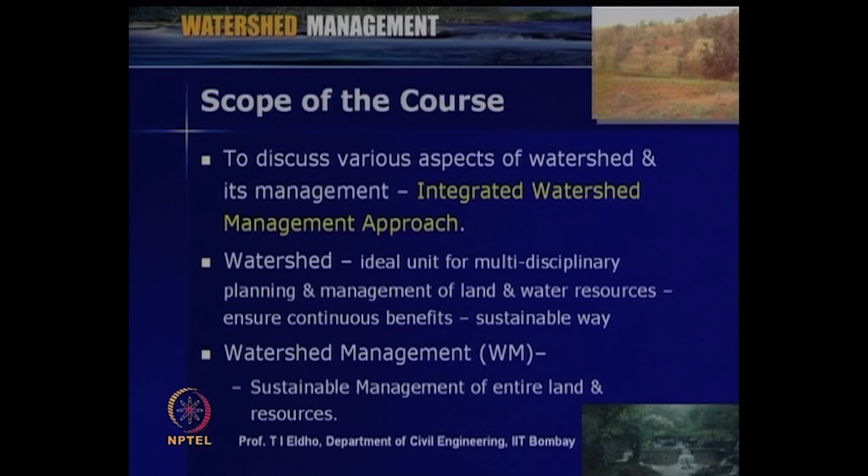The scope of the video course on watershed management is to discuss various aspects of watershed and its management in a holistic way. This course will be discussed following the so-called integrated watershed management approach, discussing the various resources in a watershed holistically. A watershed is an ideal unit for multidisciplinary planning and management of land and water resources, so that the various management practices ensure continuous benefits in a sustainable way.

A watershed is a geographical area delineated as per the topography, and that is the basis for the various management practices of water, land and other resources in that area. When we talk about watershed management, we discuss it in the perspective of sustainable management, meaning all the resources available in the watershed are managed in a way useful for both the present and future generations. Hence, it is the management of all the resources within the watershed.

Now coming to the course objectives. The various course objectives are listed here: to discuss various aspects of watershed development and management, that is, the resources within the watershed, its technological, social, ecological, environmental, and sustainable management issues in a holistic way. That is the main objective of this course.

The main focus will be the various technical aspects of watershed management, with emphasis on the perspectives on land and water management. We will be discussing the various complex issues within a watershed, analyzing the issues, and discussing the specific knowledge related to various issues of the watershed considered and its management in a holistic way.

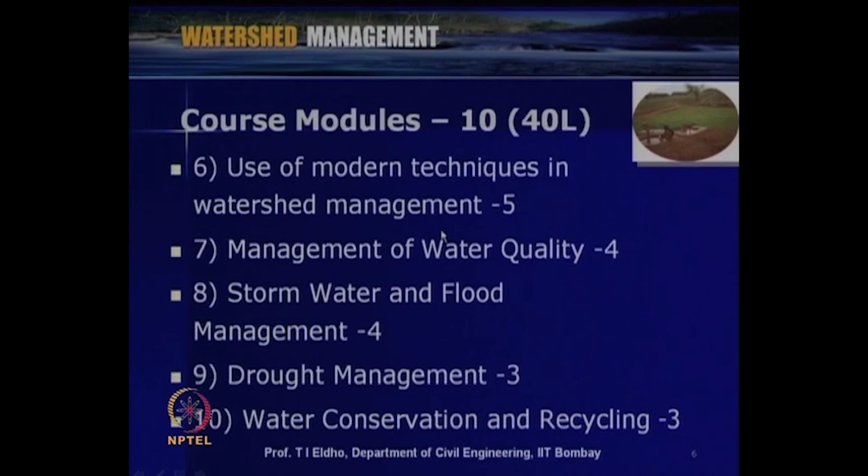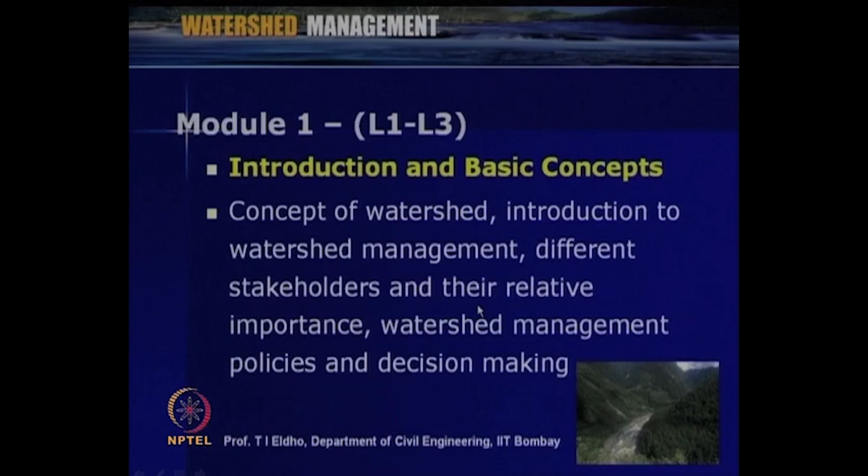Today we will be starting the first module, on introduction and basic concepts. This first module will have 3 lectures, covering the concept of watershed, introduction to watershed management, different stakeholders and their relative importance, and watershed management policies and decision making. We will discuss the first lecture today.

The first lecture is on introduction to watershed management. Today we will discuss the concept of watershed, watershed approach, common watershed problems, introduction to watershed management, watershed management necessity and principles, and a case study related to these topics. Important keywords for today's lecture include watershed management concepts, characteristics, deterioration, necessity and principles.

First we will discuss the concept of watershed. A watershed is a geographical area identified topographically, surrounded by ridges, where water falling on that area drains to a single outlet, as in a river or a lake. When we discuss watershed in a holistic way, we have to discuss the various issues happening with respect to land, water and various resources within the watershed.

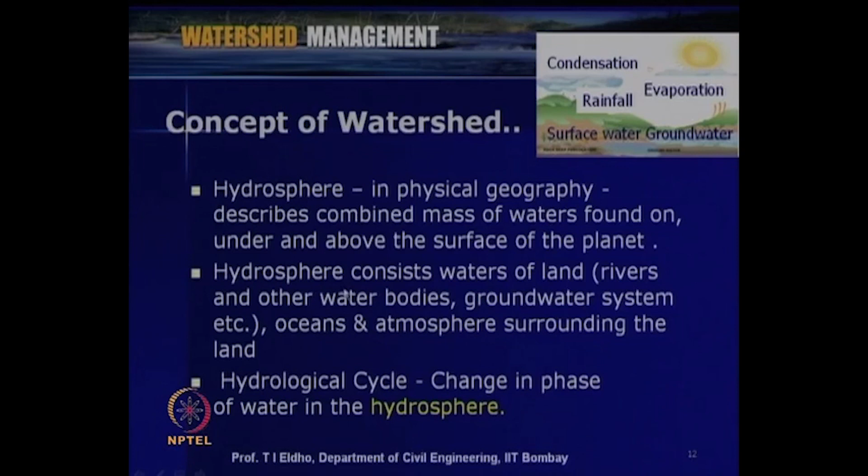Finally, evaporated water will be condensed and come back again to the system, say the watershed, which we consider as rainfall, and it will be repeated as a hydrological cycle.

When we discuss the management of water within a watershed, we have to see the various phase changes happening within it, like precipitation to runoff, and during that process, various stages like interception, evaporation, infiltration, and finally runoff from the outlet of the watershed. So the various issues related to water will be considered in a holistic way within the watershed.

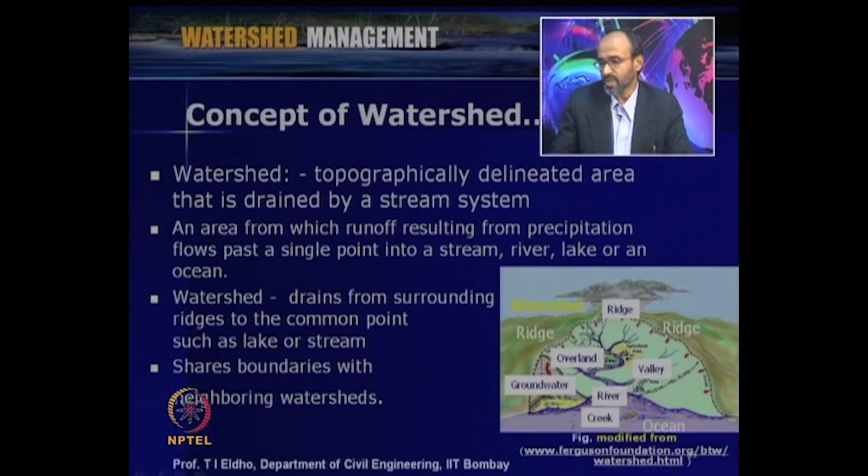Coming back to the basic definition: a watershed is a topographically delineated area that is drained by a stream system. A watershed is typically represented as shown in this figure, with a ridge here and another ridge there, and this is a major stream or river. Whatever precipitation falls on this watershed area is transformed to runoff and finally comes to the river, which we consider as the outlet of this watershed.

So this watershed is an area from which runoff resulting from precipitation flows past a single point into a stream, river, lake, or even the ocean, as shown in this figure. The water falling on the watershed as precipitation, whether rainfall or snowfall, drains from the surrounding ridges to common points such as a lake or stream.

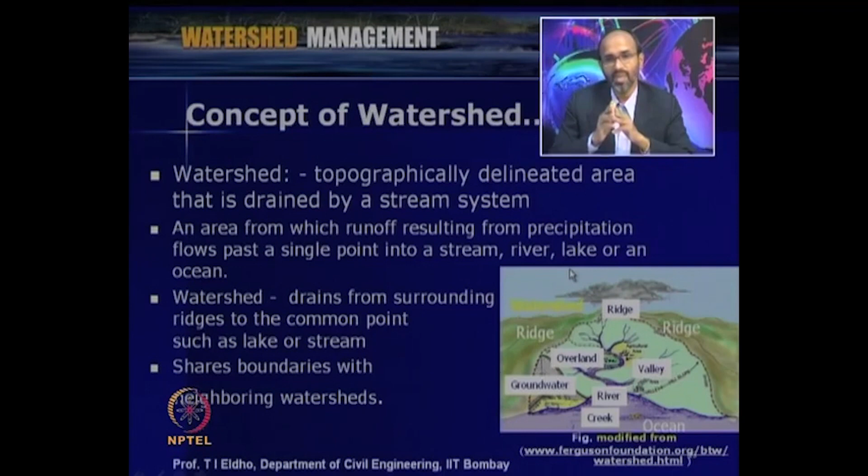When we consider the geographical area of the watershed, we delineate this area as a watershed, which is of course bounded by other watersheds. This is the watershed we now consider, but surrounding it on this side is another watershed, and on that side another watershed. So the watershed we consider shares boundaries with neighboring watersheds. We separate the watershed as a scientific unit for the various resource managements we consider. That is the basic concept of watershed management.

Before going into further details of the watershed and its management, we have to understand the basic characteristics of a watershed, since watershed management practices depend upon these characteristics. So we should have a fundamental understanding of them.

Some important watershed characteristics: first is size, second is shape. Size means it can be a larger or smaller watershed depending on the area considered. Shape means it will naturally be irregular - it can be a broader shape, an elongated shape, or a narrow shape. So different shapes are possible.

The third important watershed characteristic is the physiography, or physical geography - how the land is changing, whether the watershed has hills, plain areas, or sloped areas. So physiography is very important.

Another important characteristic is climate. As I mentioned, we will discuss various resources within the watershed, and one important resource is water. Climate issues like the rainfall pattern within the watershed, the temperature pattern and its changes, and how rainfall converts to runoff - all these issues will be discussed under climate related to the watershed.

Then the drainage system - as shown in this figure, for the considered watershed, the rainfall-to-runoff process takes place first over land and then through channels. The drainage system is a major factor; depending on it, water moves through the watershed. So the drainage system, its pattern and characteristics, is very important.

Another important issue is land use - how we use the available land for various resource management like agricultural practices and other uses, industrial uses. Land use is very important: how much percentage is forest, how much for agriculture purposes, how much for industrial purposes. So land use is a major issue.

Then, how much is the forest in the watershed. Vegetation is an important issue in most watershed management practices.

Another important watershed characteristic is geology and soils. The various resource management practices taking place within the watershed depend upon the soils and geological aspects.

Finally, another important issue for watershed characteristics is socioeconomics. For holistic development of the watershed area, we have to study in detail the socioeconomics of the people residing within the watershed.

These are some of the important watershed characteristics which we have to consider before going for any watershed management practices. All these various characteristics will be discussed in detail in various lectures.

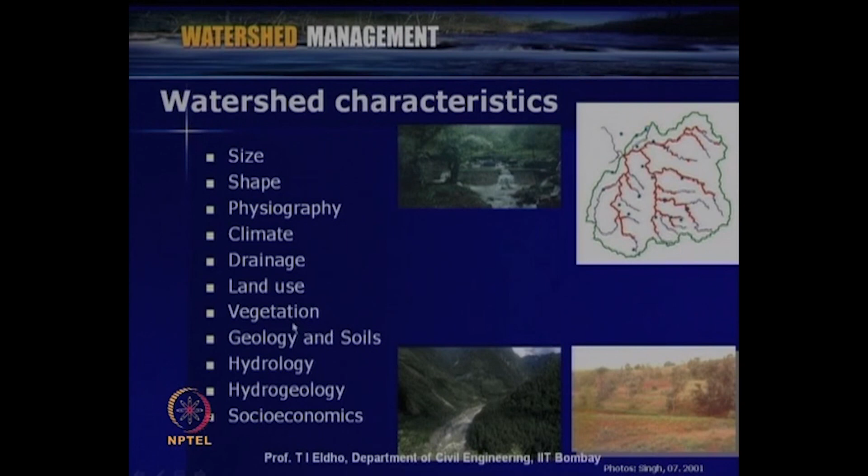Before going to other issues, let us initially look into the size of watershed. Other characteristics like shape, physiography and others will be discussed in other lectures. Today let us have a brief discussion on the size of the watershed.

When we go for watershed management practices, the size is important, whether it is a very large or small watershed. A watershed size can vary from a few square meters to thousands of square kilometers. As shown in this slide, there can be a major watershed of thousands of square kilometers, and depending upon the drainage system and the orders of various streams, we can further divide it.

We can consider this main watershed divided into a sub watershed. For example, this is the main watershed, and this is a sub watershed, which is a part of the main watershed. We can start various management practices considering a sub watershed also, and depending upon the area, we can further classify into milli watershed, micro watershed, or mini watershed, considering smaller and smaller areas within the given major watershed.

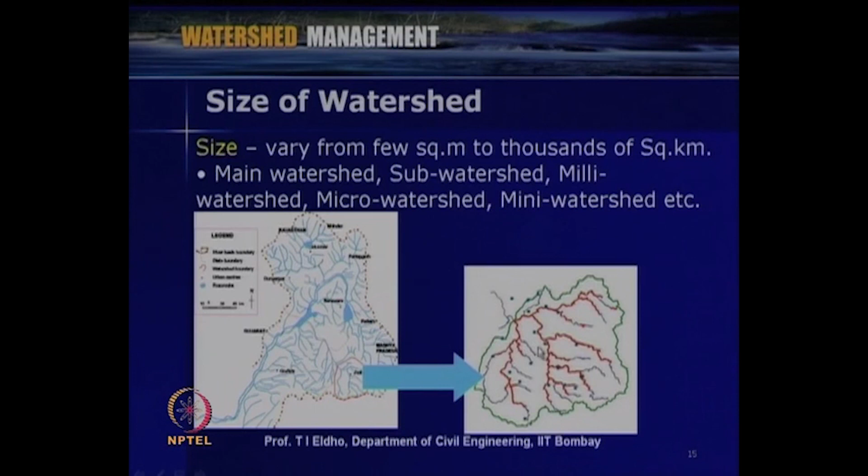When we consider a watershed, there will be other watersheds as its boundaries. For example, if you consider this watershed, this is its ridge, and this is the major stream, with other minor streams of different orders joining the major stream. So this is the watershed we consider, which is a sub watershed of the main watershed.

So now what we have discussed is the concepts of watershed. We have seen that we must consider the important watershed characteristics before undertaking any management practices for the watershed. Now we will discuss the watershed approach.

As we have seen, the watershed is a scientific area delineated based upon the topographical features of the area. The watershed area is very appropriate for various planning, management, implementation, and sustainable development of the area.

The watershed approach is appropriate to solve various resource problems, whether land, water, or other resources, for planning, implementation, and management.

On a watershed scale, it is much easier to manage land and water in a sustainable, environment-friendly way, so that we can achieve better management financially and socially. When discussing watershed management, the environmental issues are very important for the considered area.

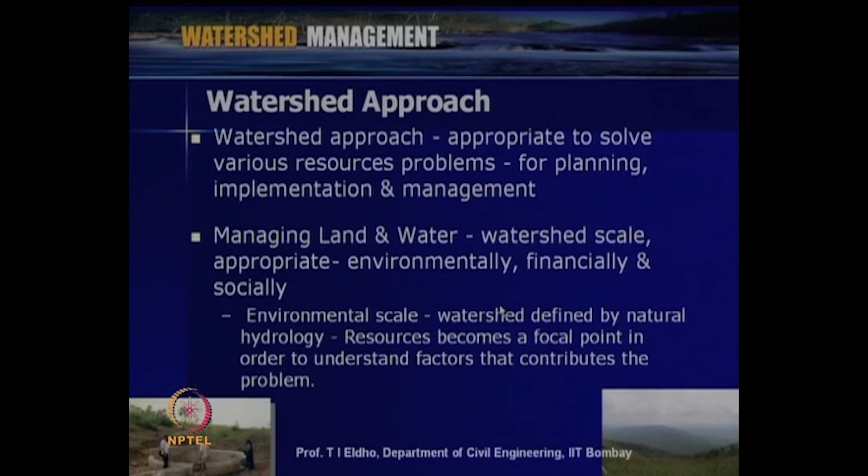On an environmental scale, the watershed defined by natural hydrology acts as an ecosystem, and whatever resources exist within the watershed become a focal point to understand the factors contributing to the environmental or ecological problems of the watershed.

Watershed management is an issue of sustainable development and management. We have to discuss various issues like financial and social issues so as to achieve optimal benefits for the area. The core of the watershed approach is a better understanding of the various factors and resources within the considered watershed.

When we go for watershed management practices, we have to consider various issues, such as modeling of various systems within the watershed, monitoring the system during implementation, and reporting under a watershed framework.

So we go in a scientific way as far as watershed management is concerned, so that we can save time and utilize the available resources or money in a better way, so that optimal management is achieved. When we discuss watershed management, one of the important issues is, of course, people participation.

The people residing in that watershed is very important. We have to consider their various issues which they are facing for the considered watershed. So people participation is the pillar of watershed approach, so that the various management practices we consider for the watershed are for the people and for the holistic development of the area.

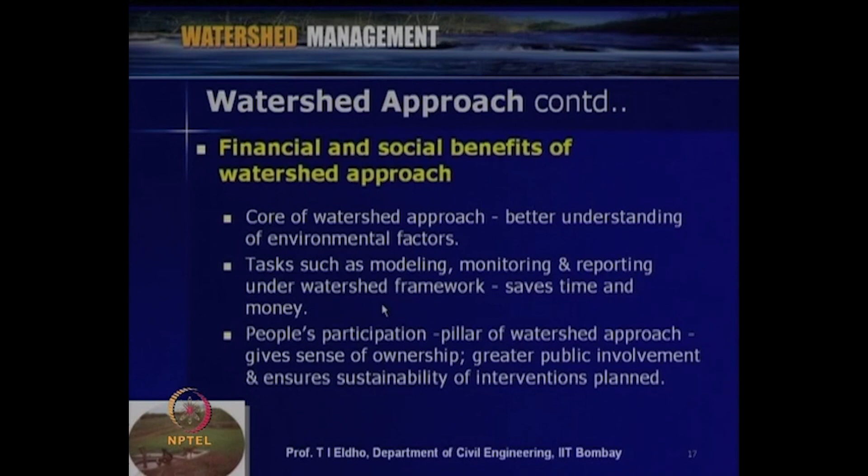When we consider people participation, it gives a sense of ownership. Greater public involvement will be there, and that ensures sustainability of the interventions which we plan within the watershed management perspective.

When we discuss watershed management, we have to see the various issues or problems faced by a watershed. So here we will be discussing watershed deterioration and watershed related problems. Generally, in a watershed, the deterioration happens when various project implementations or activities are happening within the watershed in an uncontrolled, unplanned and unscientific way.

So generally, uncontrolled, unplanned and unscientific land use is a major issue as far as a watershed is concerned. For example, if we consider the agricultural land within the watershed, if the practices followed by farmers are not scientific or appropriate for the land or watershed, then there will be problems or deterioration to the watershed.

Then watershed erosion - due to various faulty land management practices, there can be soil erosion, and the top fertile soil will be eroded away from the watershed, making the soil unfertile.

Then some issues like shifting cultivation by the farmers - that also can be an issue as far as agricultural land is concerned.

Then as far as other resources like forest land and grasslands are concerned, there can be uncontrolled tree felling and issues like forest fire, leading to reduction in forest area. And for grasslands, grazing done without appropriate management practices will reduce the grassland, and grass will not be available for the cattle - that can be an issue.

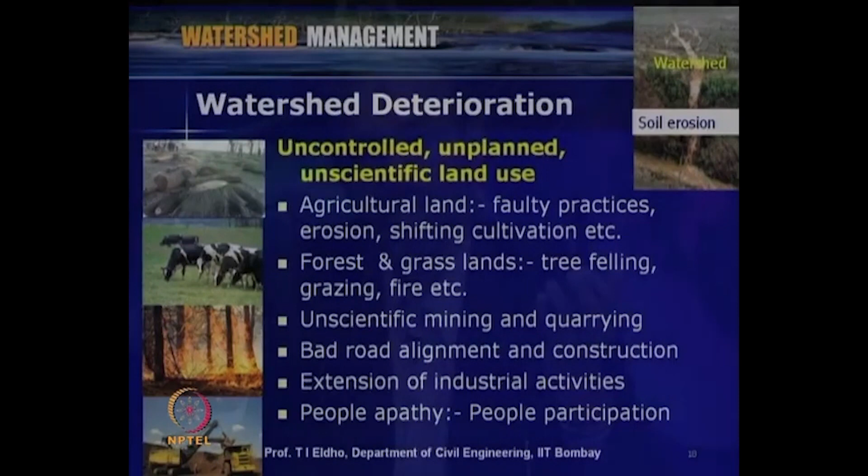Then another major issue as far as a watershed is concerned is people apathy - people are not concerned about what is happening in their locality or in that watershed. As I mentioned, for appropriate management of watershed, people participation is very essential.

So people should feel that the various developmental activities taking place within the watershed are for the development of that area and for the betterment of the people there. People should actively involve themselves in the various watershed management implementations and maintenance of the system.

Now we have seen the various causes of watershed deterioration and what are the consequences - those are listed here. One of the important consequences is low productivity.

The productivity of agriculture, grasslands, forests - there will be a total reduction in biomass. When we consider this watershed as a scientific unit, we go for scientific management of the various resources within the watershed. Most of the time, low productivity means whatever agriculture practices are there, productivity is less, and products from forestry are also reduced. So low productivity is a major issue.

Then as far as water issue is concerned, there is lack of sufficient water, surface water or groundwater, so farmers cannot go for irrigation. That can lead to various issues related to not only domestic water supply, but water for agriculture and other activities - it can be declination of surface and groundwater availability. For example, if groundwater is concerned, the issue can be increase in cost of irrigation.

Based upon this analysis of watershed deterioration and its consequences, let us look into typical watershed related problems. These can be physical problems of the area, such as steep slope, bad lands, soil erosion, etc., which we have already discussed.

Typical watershed problems can also be resource use problems, like agricultural practices happening within the watershed, and forest management issues such as shifting cultivation, forest fire, and deforestation. These are some of the resource related issues.

Then there are the end problems. All this finally leads to reduced yield, flooding during the rainfall or monsoon season, and droughts in the summer season. These are some of the end problems as far as typical watershed problems are concerned.

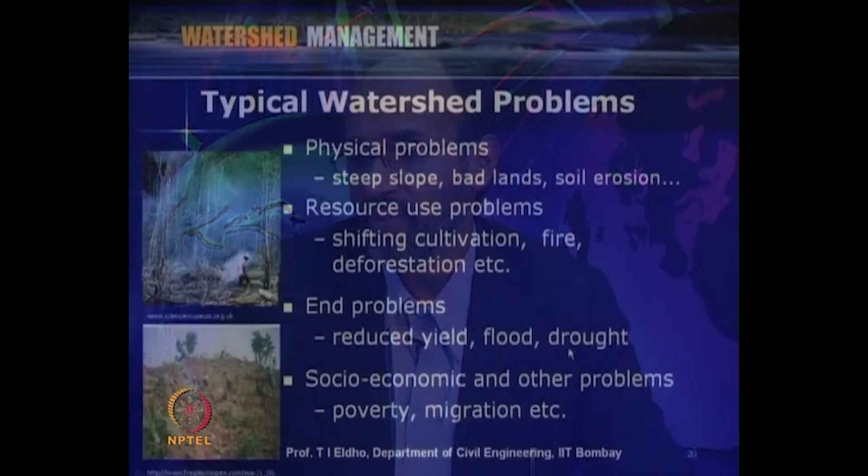All this finally leads to socio-economic problems for the people residing in that watershed. If there is no sufficient yield from agriculture, there is no sufficient job or money for the people, which can finally lead to poverty, causing people to migrate to other areas. So as far as socio-economic issues are concerned, mainly poverty, migration and other related issues.

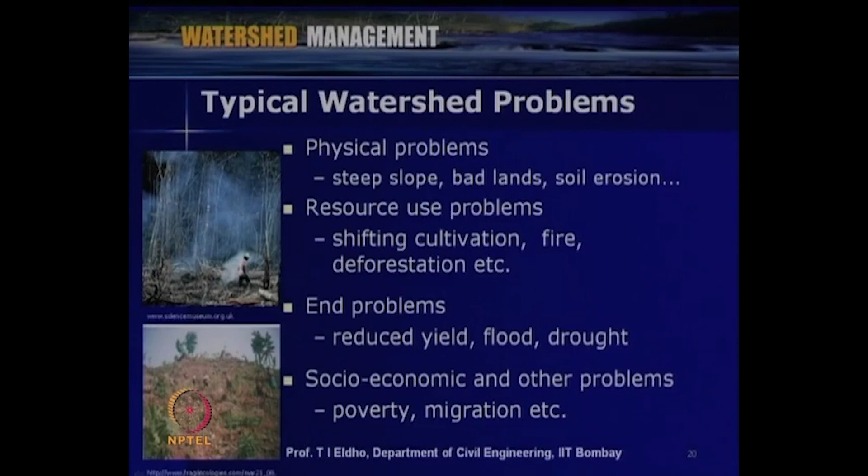Mainly the complications can be grouped into two issues: land related issues and water related issues. The land related issues are due to human interventions within the watershed, such as changing the contour of land and land use, and various pollution problems within the watershed.

Some of the remedies can be appropriate land management and appropriate waste management, so that we can stop pollution at sources, and reduce the use of fertilizers, herbicides and pesticides for various agricultural uses. Depending upon the watershed, there can be various such remedies.

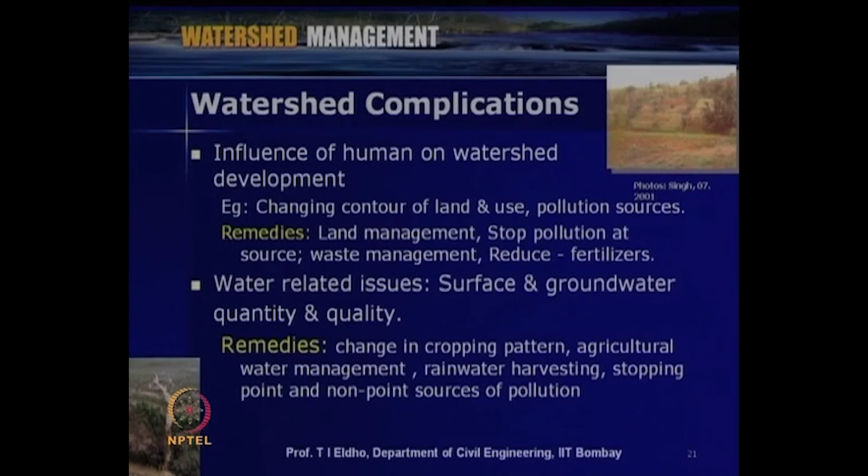Within watershed management practices, we can look into various issues like appropriate agricultural water management practices, rainwater harvesting, and changes in cropping pattern, along with other important issues like pollution and environmental problems, such as soil pollution and water pollution. We can look into these pollution issues as far as water and land are concerned, so that we can achieve better environmental management.

So within this perspective, we have seen in the previous slide the watershed complications and their remedies. Now coming back to watershed management, why do we have to go for watershed management? What is the necessity of watershed management? Some of the important necessities of watershed management are listed here.

The watershed which we consider is a specified scientific area, and we are looking for better management of various resources within that area. Within this perspective, when we look into the necessity of watershed management, the necessities include better water and land management. So we are looking for the best management practices.

That is based upon the land which we consider and the water within the land. Then for stability of land use in lower areas, when we consider the topography of the watershed, there can be upper land, middle land and lower land. Whatever you are practicing within the upper or middle land can affect the land use or management within the lower land.

For arresting soil erosion, as we have seen soil erosion can be a major issue, improving soil moisture, reducing floods and droughts. One important consequence of watershed related issues is floods, and another consequence can be droughts. So we have to do watershed management so that the effects of floods and droughts are reduced.

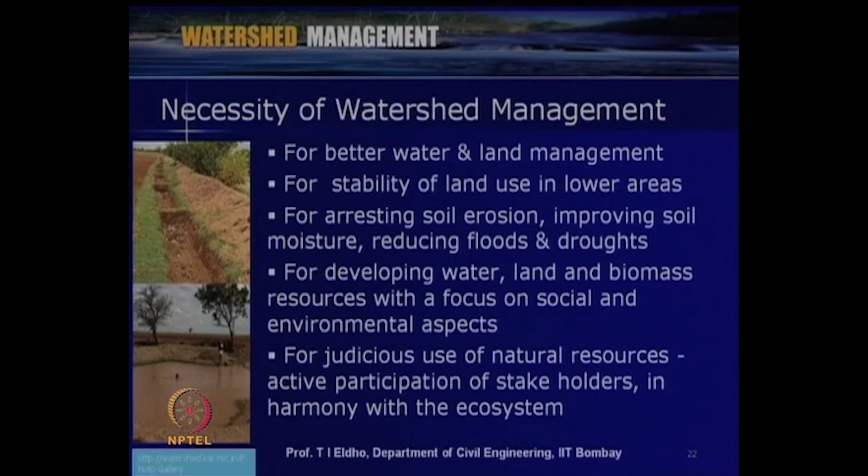Another necessity is developing water, land and biomass in an integrated way, so that we achieve social and environmental needs in a sustainable way. The watershed management necessity can also be for judicious use of natural resources in a holistic way. We have to see the harmony of various players within the watershed, like the people, the flora and fauna, and the harmony within the ecosystem.

Now we will look into the important principles of watershed management. Some of the important principles are listed here. In watershed management, we consider the utilization of land according to its capability, then maintain adequate vegetative cover for control of soil erosion.

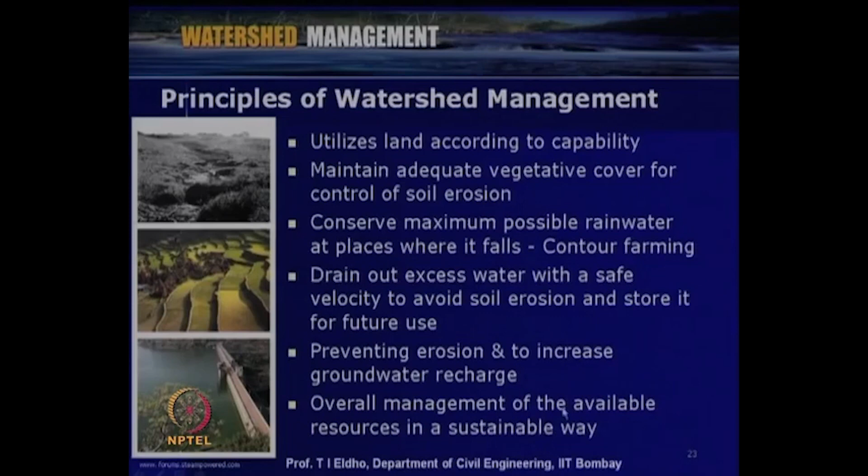Then preventing erosion, so that we are stopping the water at different locations, recharge to the groundwater system will be improved, giving better availability of groundwater for the watershed. Finally, overall management of available resources in a sustainable way. This is the most important principle of watershed management, covering various resources like land, water, forest or minerals available within the watershed in a sustainable way. These are some of the important principles of watershed management.

So in this lecture we have seen the concept of watershed, the watershed approach, and the various issues we consider for sustainable and environmental friendly development. We have seen watershed related problems like watershed deterioration and its consequences. Then we have seen the necessity of watershed management practices and the important principles of watershed management, looking at management of various resources within a watershed in a holistic way, so that we achieve sustainable development for the watershed.

Within this perspective, we will now discuss a small case study of how sustainable environmental friendly watershed management is possible. We are considering a case study of Upper Lake watershed management. This case study is taken from a paper by Nandi, titled Management of Upper Lake Watershed.

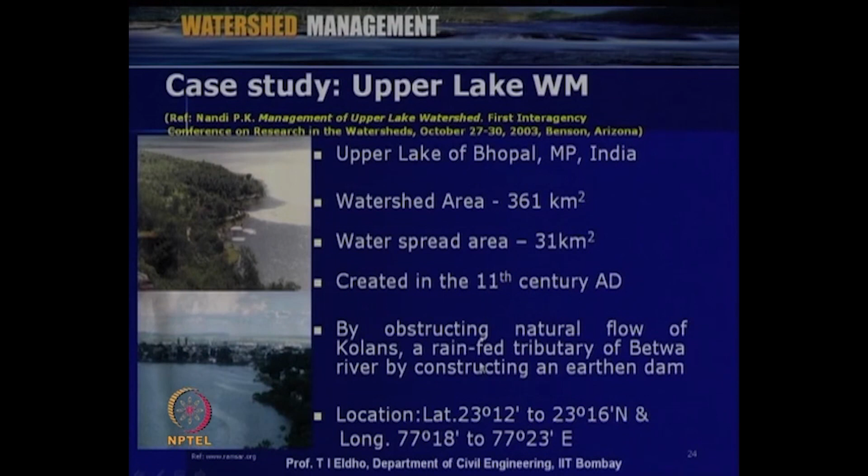This is located at latitude 23 degrees 12 minutes to 23 degrees 16 minutes, and longitude 77 degrees 18 minutes to 77 degrees 23 minutes east. As we discussed, the size of the watershed is important. This is a sub watershed of the Upper Lake, with an area of about 361 square kilometers.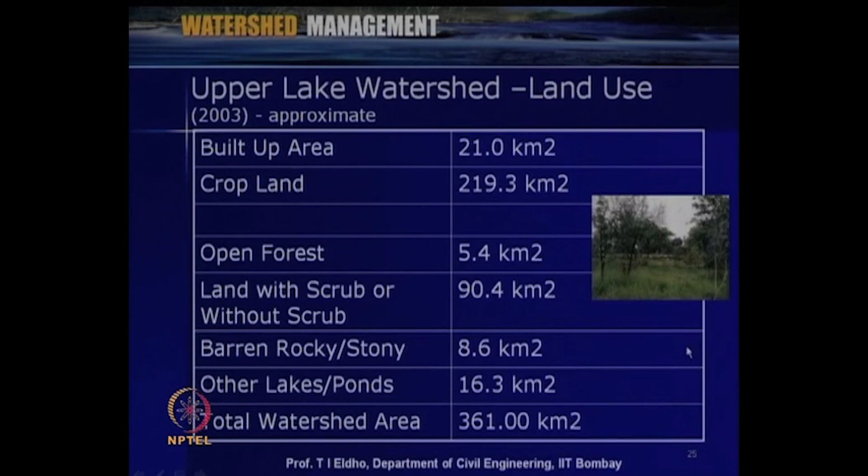When we look into watershed management for the area we consider, we have to consider it in a holistic way. So first is the land, then the water in the land, and then of course various resources within the watershed. In this case study, the main issue was the water related issue.

Some important information as far as this watershed case study is concerned: this lake is the lifeline for various farmers and fishermen. About 500 families are in this watershed. The principal source of potable water for the city of Bhopal is from this lake, serving about 1.5 million people.

Before implementing some important watershed management practices which we will briefly discuss in this case study, the various issues in this watershed were the polluted lake, the major lake, and then the total agriculture practices were not scientific, and the land was not properly managed.

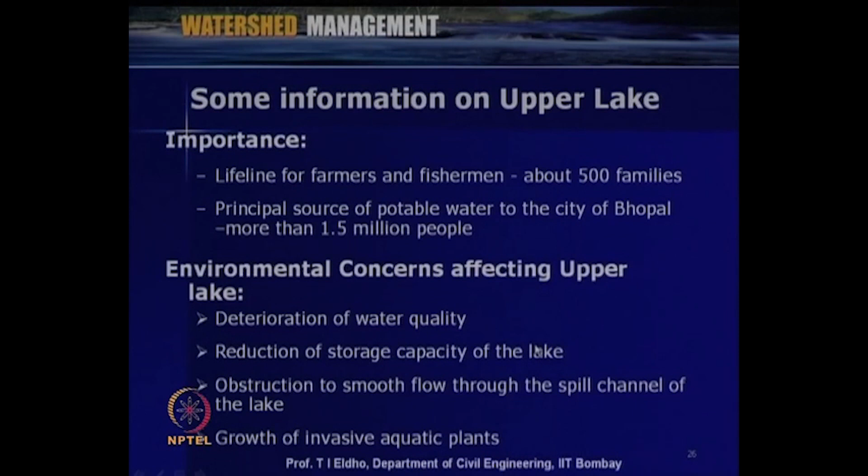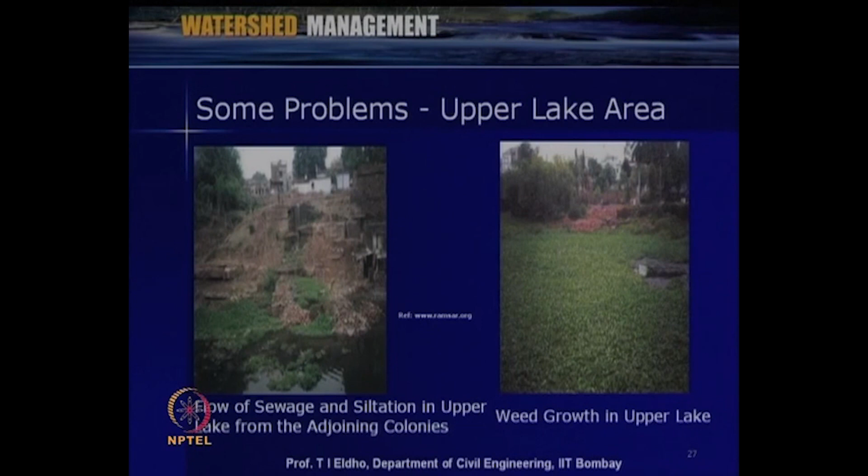Some important environmental concerns or watershed related problems for this area are listed here: deterioration of water quality, since water available in the lake was not good. Then reduction of storage capacity of the lake, issues like weed growth and polluted water. Then obstruction to smooth flow through the spill channel of the lake, meaning the drainage system was not proper. Then growth of invasive aquatic plants were there for this watershed, as you can see here. These were some of the important issues before implementing watershed practices for this upper lake area.

Due to the various problems for this upper lake area, a scientific study was carried out in the 1990s, and the Ministry of Environment and Forest, Government of India, along with state governments, put some plans for this watershed area in the late 1990s. They designated an area called Bhoj wetland along with the lower lake area downstream of the upper lake, and initiation of this project was by the Ministry of Environment and Forest and state government authorities.

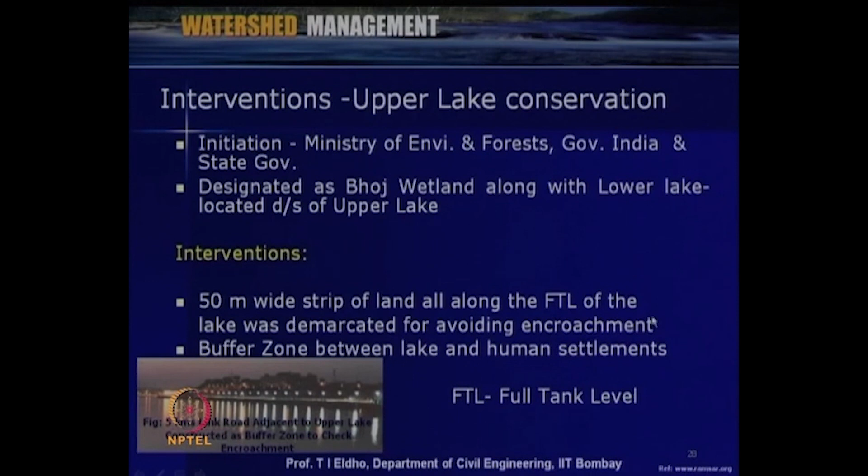Some of the interventions within the watershed perspective for water related issues are mentioned here. This includes a 50-meter wide strip of land all along the full tank level of the watershed of the main lake, demarcated for avoiding encroachment. Then a buffer zone was created between the lake and the human settlements within that watershed. These were some important interventions in this watershed.

Also, intensive plantations were implemented in this buffer zone. About 73 check dams across 28 inlet channels were implemented in this watershed. All this was done by the end of the 1990s, and the effect of these interventions was studied in 2003 by Nandi in this paper.

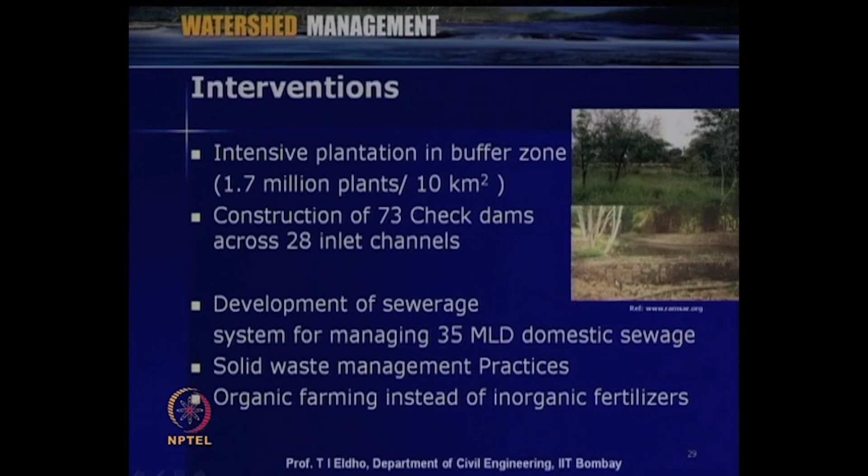As we discussed, some of the other issues were pollution problems. So development of an appropriate sewage system was done for this area for pollution management. Also, appropriate solid waste management practices were carried out for this area, and organic farming instead of inorganic fertilizers was implemented.

Another important aspect of this case study is stakeholder participation. Due to the concentrated efforts of various officials and NGOs in this area, well-coordinated awareness programs were carried out. Then reforestation of the watershed area through participation of farmers, local people, schools, colleges, and city administrations was carried out, and promotion of organic farming among farmers was also done.

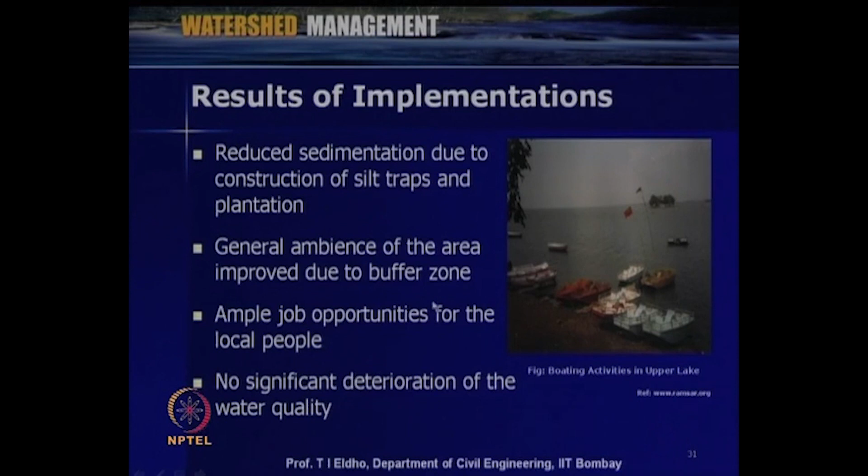Then some of the important lessons for this case study are listed here, like the necessity of an integrated watershed approach. As mentioned, for this case study, it is the management of the land, then water, then the various issues for the people, all these are considered in this study.

Then importance of conservation practices, like the necessity of a buffer zone, which has improved very much the lake considered in this area. Then overall environmental management, the necessity of a legal framework to control anthropogenic activities, since this lake was destroyed due to various human activities within the watershed. So a legal framework has been also established by various government bodies during the implementation of this watershed scheme.

Then the necessity of long term management plans. This program was implemented not on a short term basis, but a long term basis. Another important aspect I want to emphasize is people participation. The farmers, the schools, colleges, then various government organizations, all the people came together and participated for the overall management of this upper lake area.

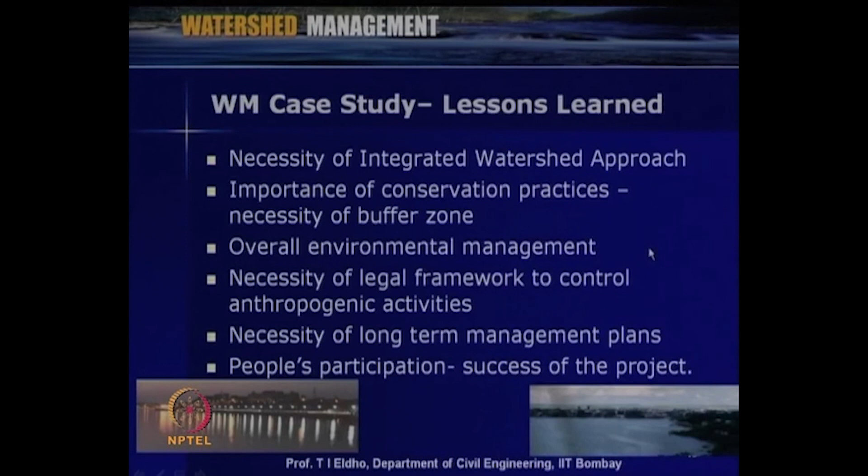So that was actually the success of this project, as we have seen the effects of these watershed management practices done in the upper lake. So with this, the basic concepts of the first lecture, which we considered in this introduction to watershed management, is over.

Before closing the lectures, some tutorial assignment problems related to this lecture are listed here. First are some tutorial questions. Most of these questions' answers are already discussed in the slides. I have listed 4 questions here.

First one is: discuss the watershed concept within the perspective of holistic development of an area. We have already seen this - we have to see not only the land, but also water and other resources, considering it in a holistic way.

Then second question is: illustrate important watershed characteristics. We have seen various characteristics like size, shape, hydrological aspects, climate aspects, and other issues we have to consider in watershed management practices.

Then describe watershed deterioration and its consequences. We have already discussed the various typical problems related to watershed deterioration, and what it can lead to, like droughts, floods, or poverty.

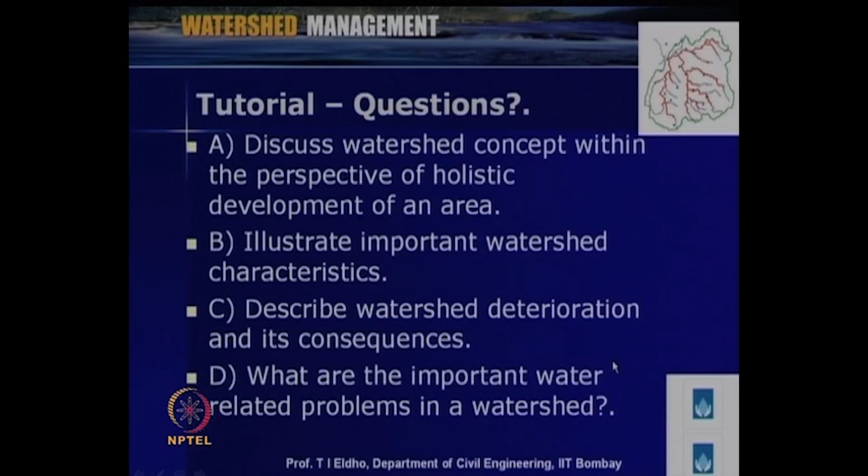Then the fourth question is: what are the important water related problems in a watershed. Various issues we have already discussed.

Then for those going through this lecture, some self evaluation questions are listed here, like: what is a watershed, and what is the importance of watershed based approach in water management.

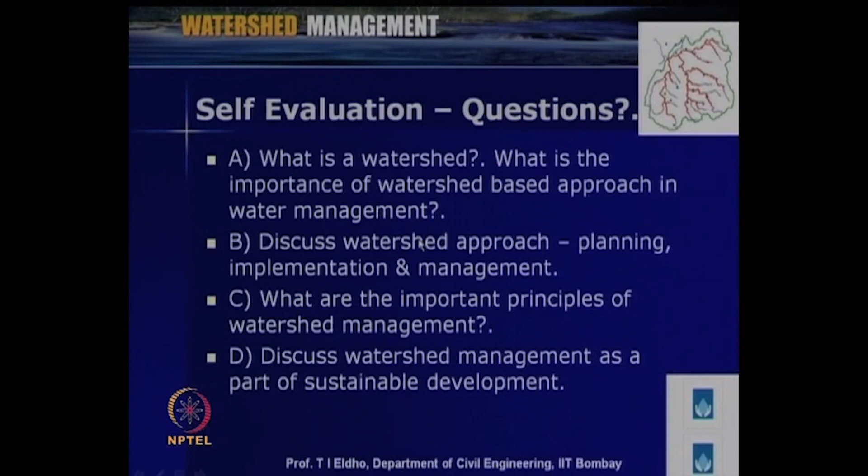Then second question is discuss watershed approach, planning, implementation and management. Third question is: what are the important principles of watershed management. And fourth question is: discuss watershed management as part of sustainable development. All these self evaluation questions we have already discussed in various slides in the lecture.

Then a few assignment questions are also listed here. Question number 1: discuss water management in a watershed as part of the hydrologic cycle. That we have already seen in the initial part of the lecture.

And what are the typical watershed related problems, like watershed deterioration, its consequences, and watershed related problems.

Then discuss the necessity of watershed management by considering various problems in an arid zone watershed. In an arid zone watershed, the rainfall or precipitation will be less, so we have to see especially the water related issues for watershed management.

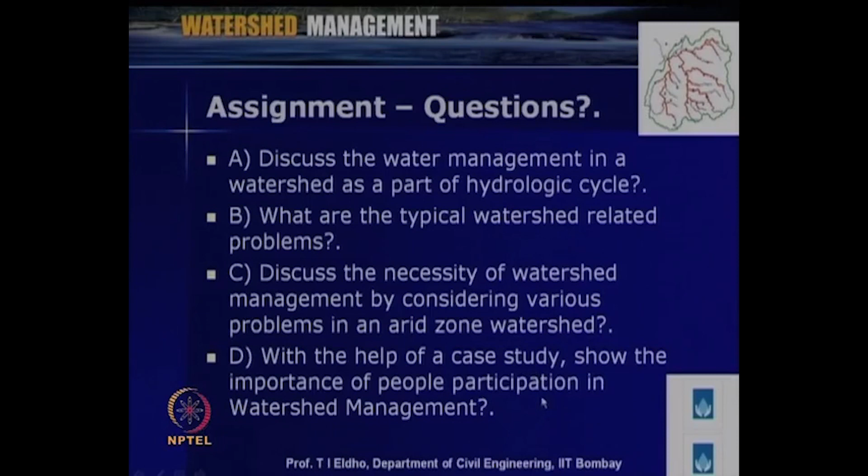Then the last question is: with the help of a case study, show the importance of people participation in watershed management. We have already seen one case, so similarly other cases can be analyzed.

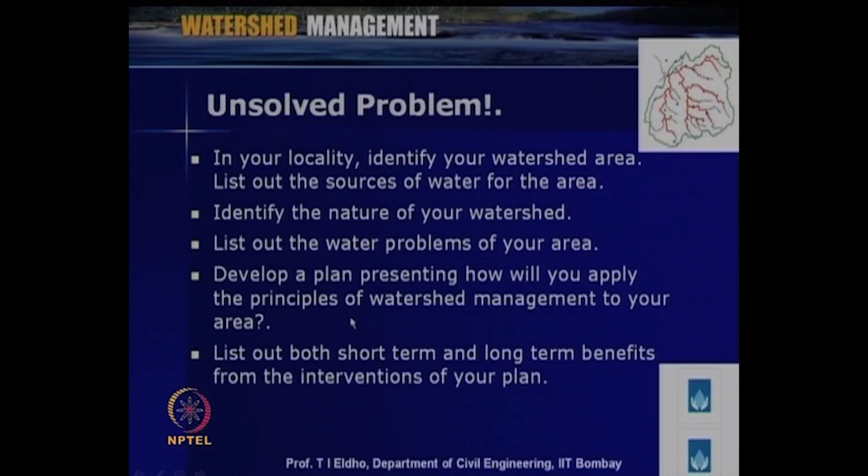As a last slide here, one unsolved problem is put here for the listeners going through these lectures: in your locality, identify your watershed area, list out the sources of water for the area, then identify the nature of your watershed, list out the water problems for your area, then develop a plan presenting how you will apply the principles of watershed management to your area, then list out both the short term and long term benefits from the interventions of the watershed management plan. So within the perspective of the various issues we have discussed, you can prepare this for the watershed which you consider.

So in this introductory lecture, we have seen the basic concepts of watershed, the necessity of watershed management, then principles of watershed management, and also we have seen a case study related to various issues of watershed management. Thank you very much.